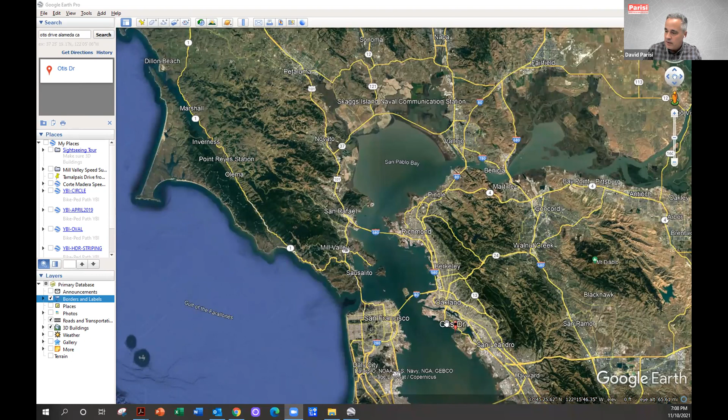Well, real quick, let me get this set up. You guys see the screen I have up right now? This is just Google Earth. Here's Petaluma, here's where I live. But over here is Otis Drive, in the city of Alameda, which is actually an island. I'm going to talk to you about this 1.1 mile corridor, what it looked like and what it is now. Let me show you by going right to a presentation.

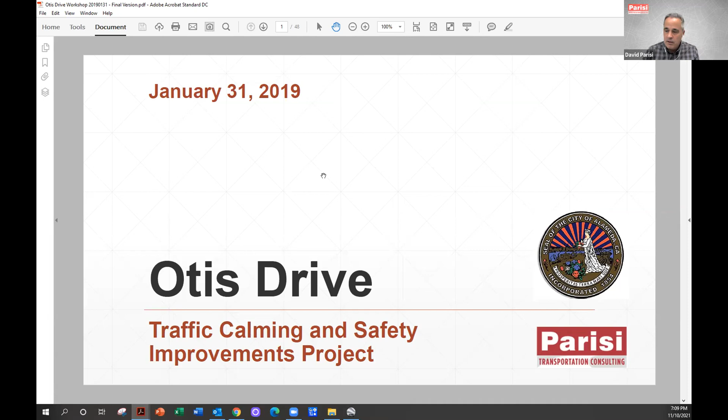Do you see the slide that says Otis Drive now? Okay, fantastic. So we actually worked very closely with the public because there were a lot of naysayers and folks who didn't want any change whatsoever, even though there were some existing issues occurring on this roadway. What I'm doing is recycling a presentation from our first meeting, because it was really effective, although it took a lot of work right up front.

We wanted to communicate with the community about the project's goals. At this first workshop, held in a gymnasium, we had about 100 people in attendance. But we also knew it was very important to get community input and really see if we understood what the issues were, because I think the most success we've ever had is where we've really listened and gotten ownership by a community on a project.

So this was really a listening session about current traffic and safety issues. Then we wanted to present a toolbox of different ideas and get feedback from folks on what they liked or didn't like, or questions they may have had. We had a breakout session with 5 or 6 groups facilitated to sketch out issues and ideas. This process really works well because it's important to get feedback, input, and buy-in. On this project, which was a little over a mile long, the goals were to reduce speeds.

Speeds were super high on this 4-lane street without turn lanes. It wasn't just the average speed, or the 85th percentile speed that speed limits are often based on, but also the outliers - the car that would occasionally come down the road at 72 miles an hour or something like that. We really wanted to understand that better.

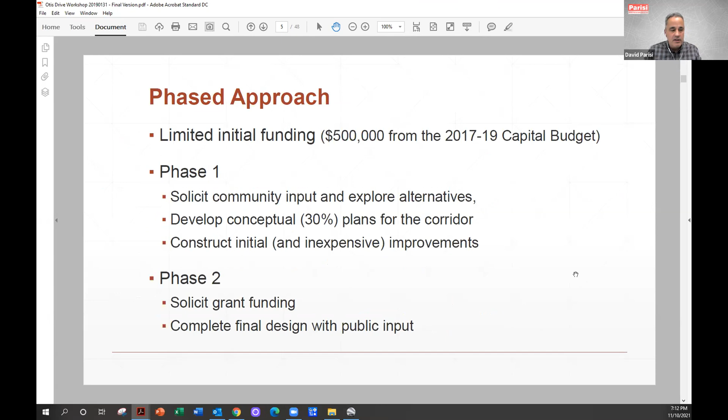We talked about the whole schedule and process, and then we dove into the history of the street. This is a fun slide, because in 1946, Otis Drive did not exist - it was out in the bay.

As Alameda started filling in, you can see it right here - the shoreline was here in the middle photo in 1958. This whole area was developed, and before long Otis Drive became a 64-foot wide, 4-lane street developed for the automobile.

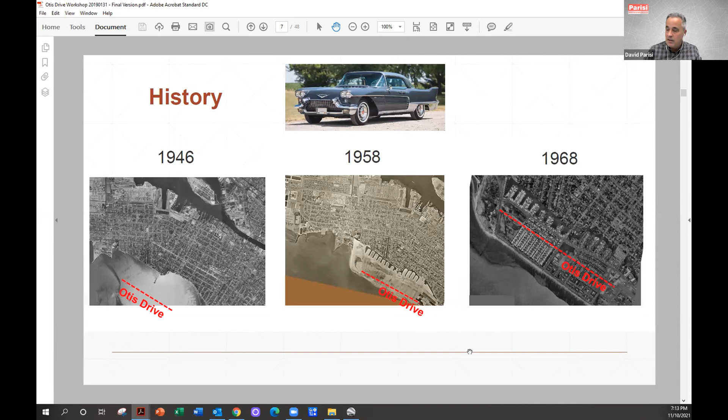And just up until last year, it was an auto street - you could actually land a plane on it. It was long and straight, and just had 4 traffic lanes and parking lanes.

We always knew it was important to also talk about things that have been done on the street, just like any streets in Petaluma. Things evolve over time - measures can be deployed, like leading pedestrian intervals, which I'm sure many of you are familiar with. When you push a button, the walk light goes up before the green light for traffic, so a pedestrian can establish their right of way in the crosswalk. It's a nice tool where it's appropriate. ADA compliant ramps were put in, and some protected left turns - a left turn arrow - and other things. But not much, just a bunch of small little things that were done.

In the meantime, here's an image of Otis Drive from west to east, and it intercepts a state park on the west side at Westline Drive. It had zero traffic controls or crosswalks all the way down to Grand Avenue, which is a signalized intersection, and also where the pedestrian fatality occurred. There was 1 crosswalk at an elementary school, and that was really it, folks - pretty straight, pretty good bypass route.

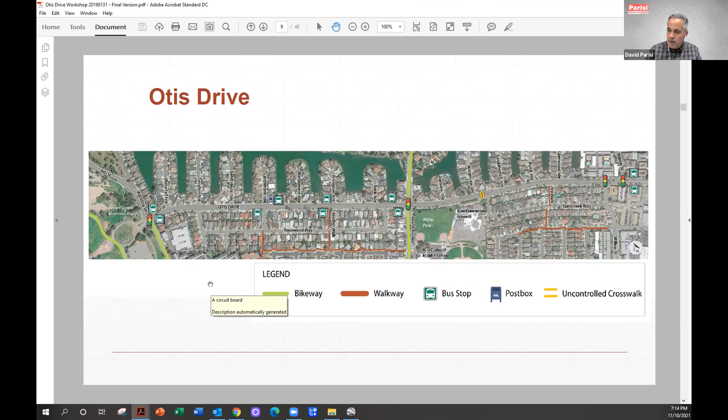And the island is developing slowly but surely, so these were things that were really on people's minds. Also, you can see the bus stops along this street. Here's how the street looked just a couple years ago - not unlike some roadways in Petaluma and in the North Bay, developed with 4 lanes of traffic and parking. Looks really familiar, doesn't it?

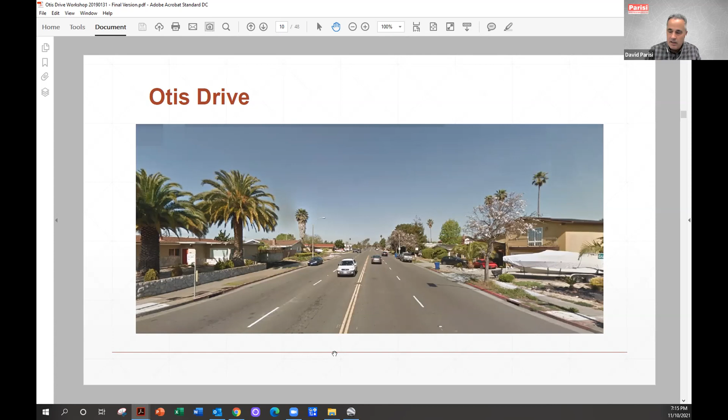We work on a lot of streets like this, and I almost see these as opportunities, actually, because I don't fret about wide streets. I think it gives you a lot of opportunities to do some things after you go through a good planning process.

We also knew it would be very important, even before we jumped into public outreach, to do a survey and really understand where people were coming from, so we'd be a little more armed and not get blindsided at a community meeting. We really wanted to understand people's input. Some of this presentation was developed based on what we knew from that input.

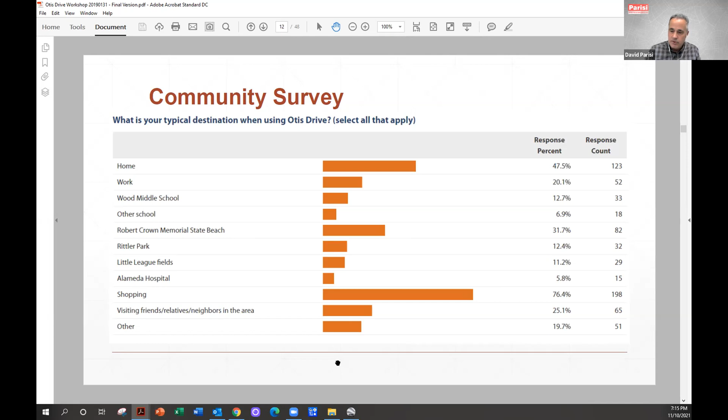For instance, we asked people before the meeting what their typical destination was. Was it work, home, a school, a park? What did you find most challenging? We ranked those responses - people thought traffic speeds or the safety of walking or biking, all down the list. And then some qualitative narratives from folks.

Speeding is a big issue. People drive like it's a freeway. Tough to get across the street. There's an intersection in the middle of the corridor at Grand that just had a green light, red light on each approach, with no left turn arrows or turn lanes. It was really confusing because it was right in front of a park and a school, and it was kind of a desolate street. Some folks wanted more trees and a better streetscape.

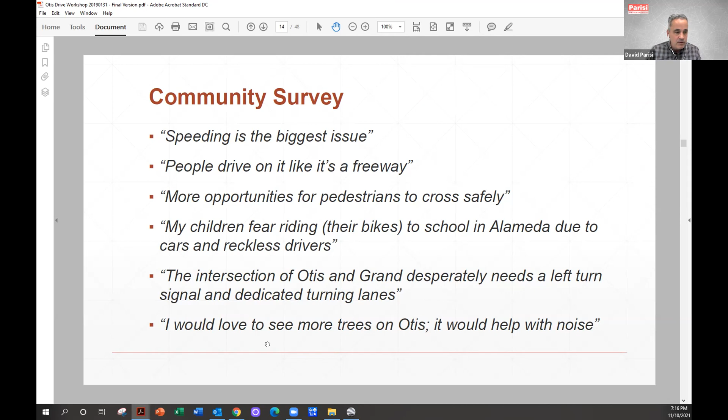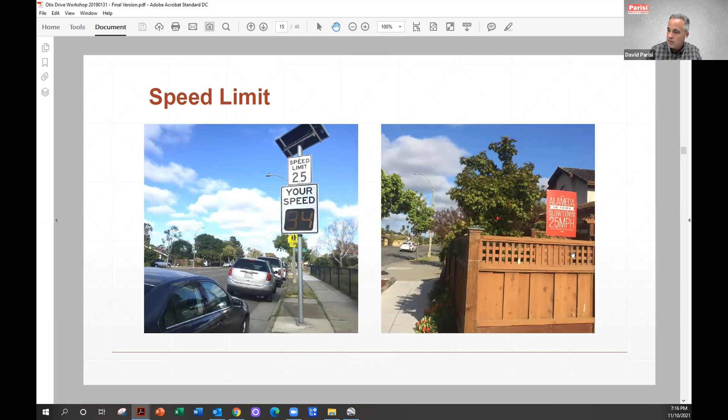The speed limit posted at 25 - you can see this sign here that says your speed 34, and that was on a good day. There were people driving very fast along this street. Like I said, there wasn't really any incentive not to, because the lanes were wide and there weren't any calming things in effect. In fact, some people took it into their own hands to add signs saying slow down, it's our town.

We knew it was also important to understand the types of collisions occurring, so we looked at a 5-year period and plotted them out. Bicyclists and pedestrians were involved in about 19% of collisions, but of those severely injured or killed, it was 54%. So vulnerable users - we have to be very careful, particularly with the speeds we saw and the long crossing distances.

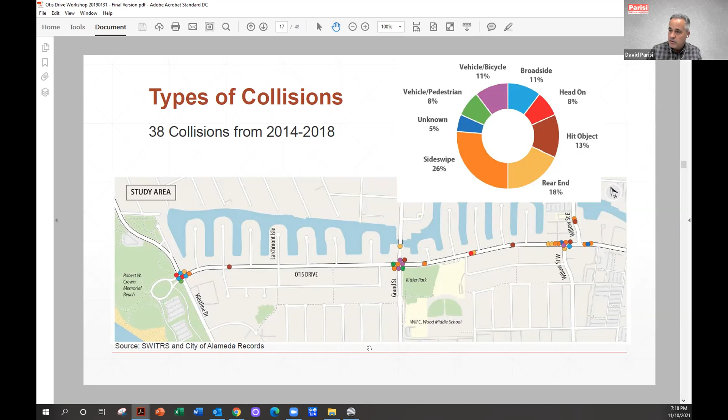That's partially what this project was designed for - those vulnerable users - but also to encourage and provide better safety for bicyclists and pedestrians. Injury-fatal crashes by mode was actually 54%. So it's really important to understand that and who's suffering the most from these types of collisions.

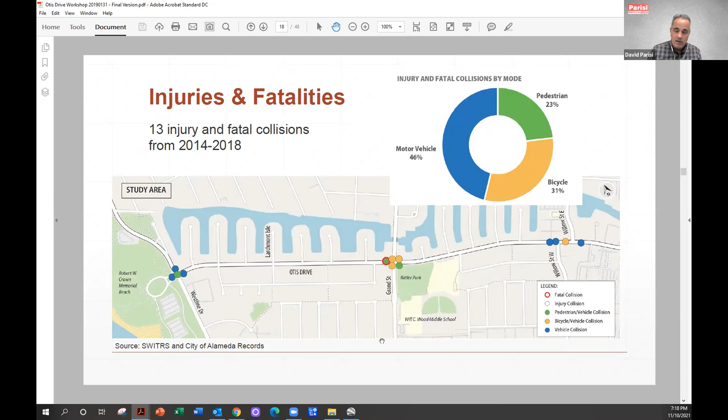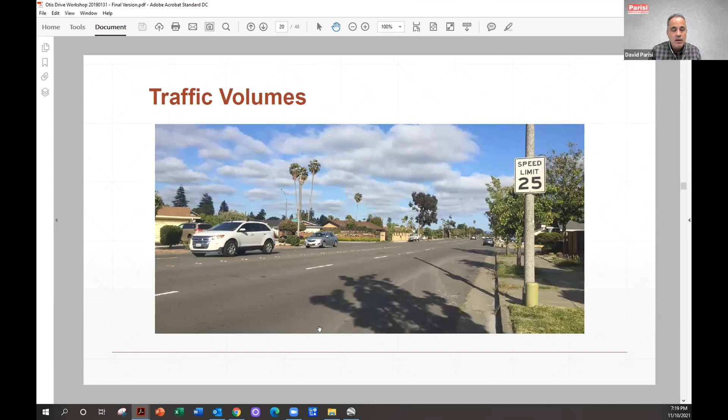There were a lot of folks who didn't want to see any change to the street, including many who lived along it. They felt that any change in the number of lanes would cause extra congestion or traffic diverting to other streets. So we looked at traffic volumes on both sides of the corridor and plotted them in each direction. Average traffic volumes varied from about 9,800 on the west side to almost 15,000 on the east side. Road conversions of 4 to 3 lanes typically happen at about 20,000 vehicles, so you can start looking at that.

So we were well below that threshold. In other words, we knew that if this was done in a very methodical way, we would possibly be able to take it down from 2 lanes in each direction to 1 in each direction with a 2-way left turn lane. We proved that to folks by overlaying it with lines showing the capacity of a roadway with 1 lane in each direction, shown in red here with red dots, about 1,000 cars per hour per lane, versus a roadway with 2 lanes in each direction, which this road had at the time. So you can see this is already well below what would be the threshold typically for doing a so-called road diet, a term we're not using a whole lot these days, but we did it during this exercise. We just like to think about reallocating the traffic lanes.

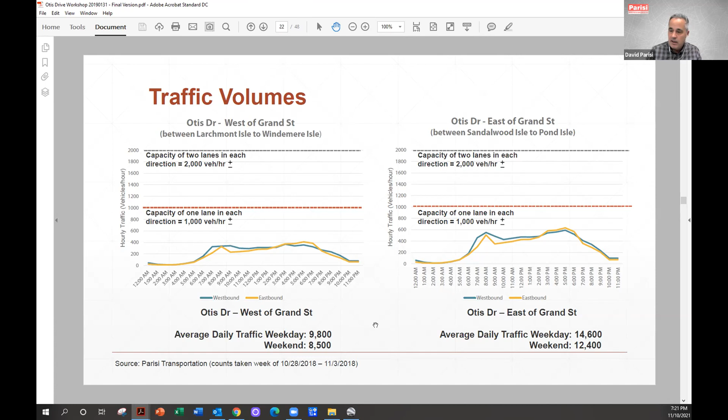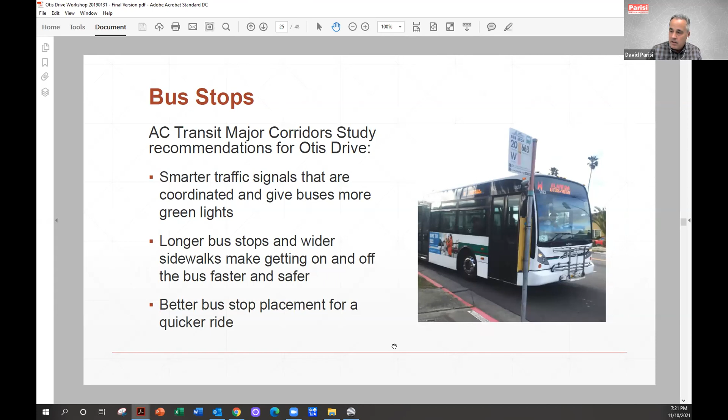Bus stops, as you can see in these pictures, the buses really didn't have ADA stops. It's hard to tell, but they were also near side, which would cause more congestion and inconvenience for drivers when they're entering back into traffic. Some bus stops had higher ridership than others as well. So those are things we took into account because we wanted to see if it makes sense to relocate and improve some of the bus stops and their operations. AC Transit, the bus provider there, has some goals and objectives that we were working with at the same time.

So the next thing we did with the community is we mapped out some traffic calming and safety tools we thought should be discussed and what we heard about from community members. Just a real quick overview of pros and cons of the different types of measures. And we wanted to understand and describe what traffic calming is and what some of the safety objectives were. We went through some of that.

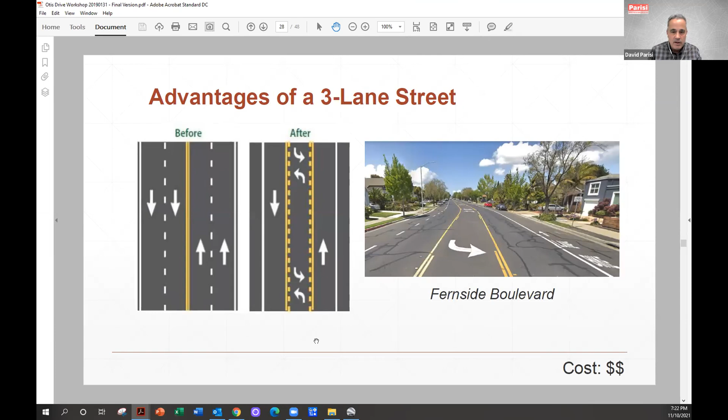First off, we obviously talked about the advantages of a 3-lane street instead of a 4-lane street. You can see the before and after image on the left here. We relied on data from lots of studies, not only in the Bay Area, but compiled by the Transportation Research Board and the Federal Highway Administration, in regards to going from 4 to 3 lanes and in terms of accident reduction, speed reduction, the types of collisions that occur, what it means for pedestrians with fewer lanes to cross, the opportunities for refuge islands and curb bulbs, and what you could do with that reallocated space. In this case, lots of different things, including providing areas for bicyclists.

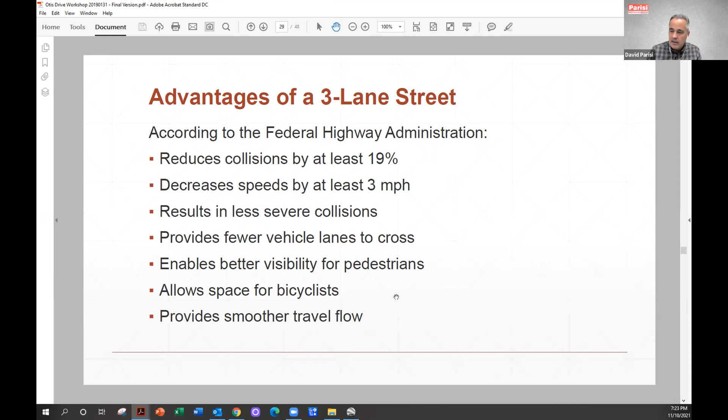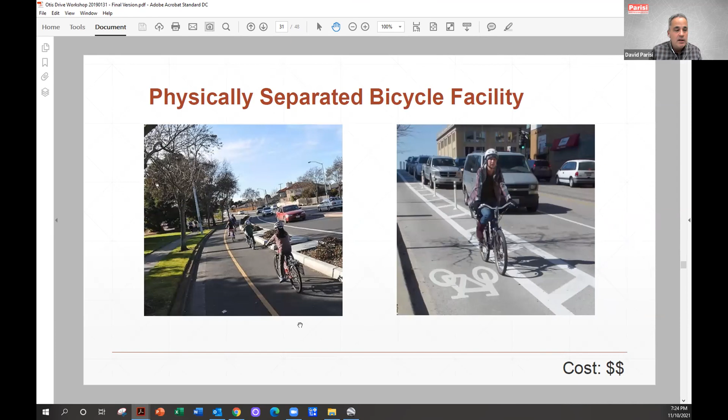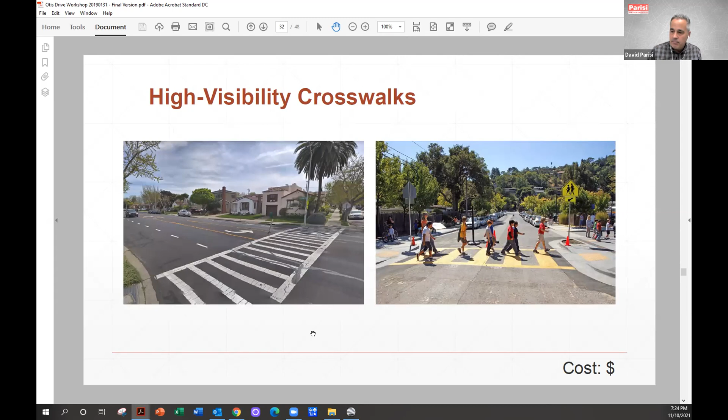In different forms, obviously as I showed you before, the roadway did not have many crosswalks across the street. So we wanted to really talk about that and understand from the community's viewpoint where those should occur and what they thought the best routes would be.

We also knew there were a lot of intersections where cars parked right up to them, really limiting the sight distance. So we call this daylighting, where we put maybe some red curb in or a curb bulb about 20 feet back or 20 feet ahead of the crosswalk, to really provide better sight lines between a motorist and a pedestrian and vice versa.

And we wanted to get feedback on other things like rectangular rapid flashing beacons, and the opportunity, if we put in turn lanes instead of 2 through lanes in each direction, but actually devoted a center lane for turns, what folks thought about that. And we gave some input on our idea.

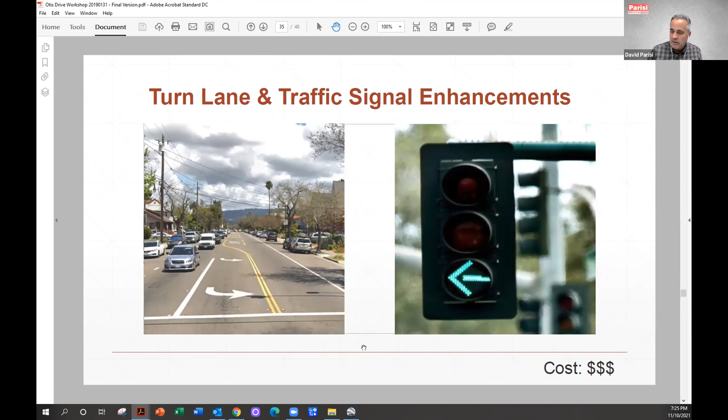This is a community that had not seen a roundabout yet, so we knew there was room. We were not going to propose or show tools that wouldn't make sense, but we wanted to get people's feedback on roundabouts. There were a lot of skeptics because they hadn't seen them. Many folks thought of the rotaries they've driven on the East Coast or some of the older ones. So we wanted to describe some of the attributes of modern roundabouts, with splitter islands and slower speeds, and the reduction in types of collisions that can occur.

I'm sure, Ken, you get this question a lot: why not put up a stop sign? We've heard it too on this street, people saying just put a whole bunch of stop signs up and down the street. As a traffic engineer, in the studies I've seen, we know that stop signs don't really slow down speeds along a long corridor because people just make up for lost time. They really should just be used for assigning right-of-way at intersections.

So we just needed to get that out there and answer those questions and get feedback from folks. Then we wanted to understand from people's perspective how important parking was to them. We knew we had a super wide street, we could retain parking, but we also realized parking could be removed. It might be beneficial to open up those sight lines, or if we wanted to shift some parking into the street a little bit to provide a parking protected bikeway, we wanted to understand the community's perspective on the importance of parking.

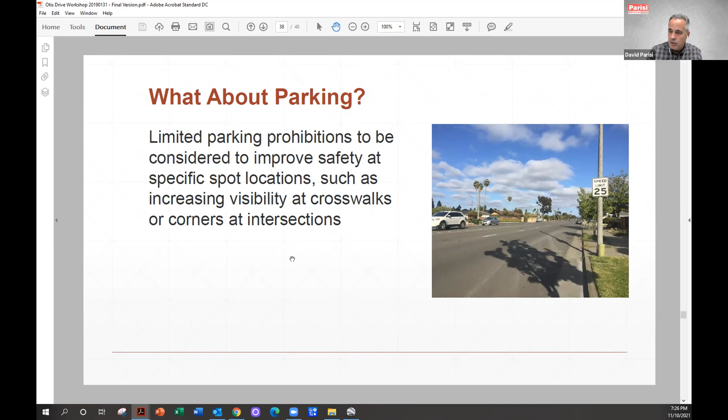We also talked through this pretty fast with the community, because when we did the breakout groups, we went into more detail with additional experts. But we presented the opportunities.

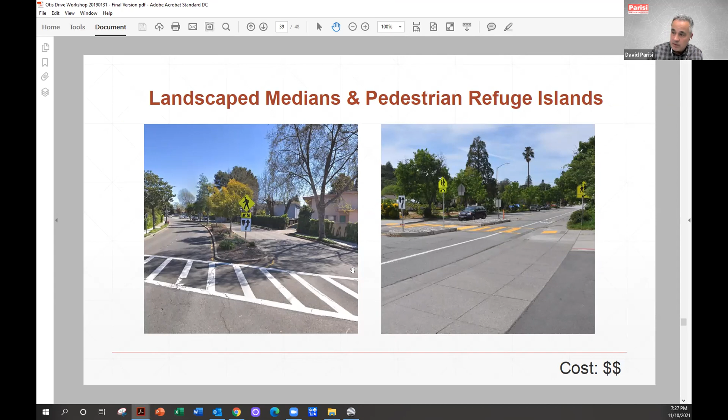If you go to 3 lanes, you could use that as a center area for refuge areas for pedestrians, enabling people to cross the street in 2 stages, which, by the way, gives you 5 times more gaps when crossing in 2 stages than in 1, just because of how the traffic flows work. You can cross one direction at a time, seek refuge, then cross the other.

That's great. Bulb outs, again, a lot of these tools have been used in Petaluma, and I love coming through Petaluma through the years because it's been very progressive in certain areas where the projects have been built.

And then we wanted to introduce what's called quick build kind of projects, because we knew that the first phase of this project may not be spending millions of dollars on concrete and drainage and other types of improvements, but actually what can we do lower cost.

We do some colorized curb bulbs, and I'm going to show you some in a bit that are proving very successful and were low cost to implement and actually look pretty good.

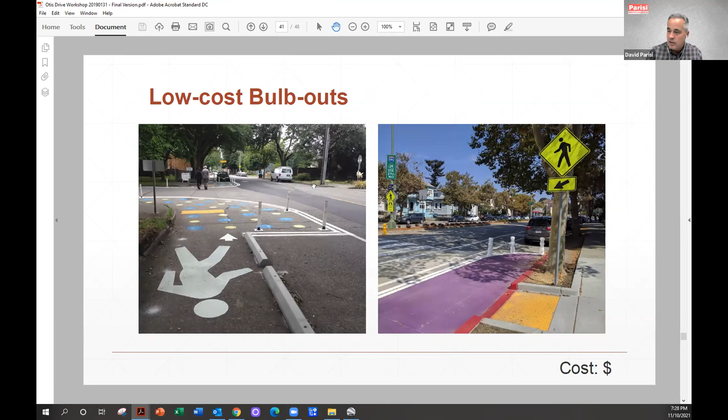But here's some samples from some other locations that we wanted to show the public and get feedback on. And of course, gateway treatments can take all forms, and what they are is just a treatment to announce you're entering a neighborhood, a pedestrian zone, or a school area. So treat this area with respect.

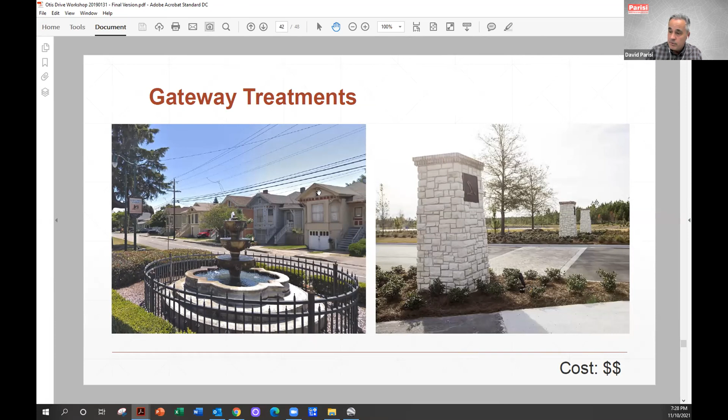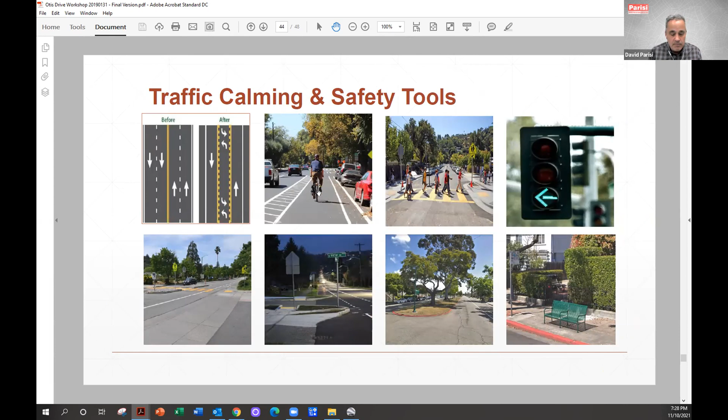This street had really poor accommodations at the bus stops, lack of benches and shelters and trash cans. And then we just said, okay, that was a lot of stuff, and there's a lot more things out there, so we want to hear from folks. Tell us your input, and we'll describe more of the pros and cons working with you.

So that's what we did. That was kind of a first workshop, and I think it's really important to bring the community involved, get the community involved, and explain things, but also just be open to listening to different ideas.

And what we did then was broke the group out into groups. Each group spent about 30 minutes with a big map of the corridor, talking about issues. Some groups just wanted to talk about their concerns, and other folks got really into it and came up with some ideas and presented their feedback back to the group.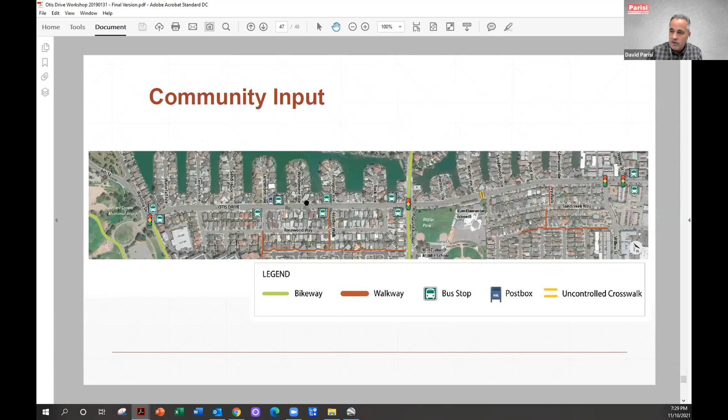What I'm going to do next is take you through where we ended up next, and then I'm going to show you a video of what actually ended up going on with the project.

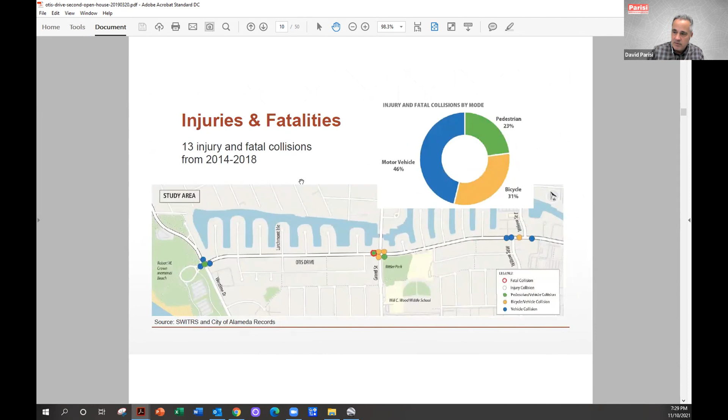It's always nice to have the police there too, to support the fact that, yeah, they're seeing these big speeds and collisions on the street.

And what should be implemented? We wanted to hear from folks, and lo and behold, the majority said, let's get that center left turn lane in, because not only can it help introduce other aspects, but even for folks living on the street, they won't have to take a left turn from a through lane and go into their driveway or out of their driveway. Maybe that could be safer to provide access. Bike lanes, landscaping, curbs.

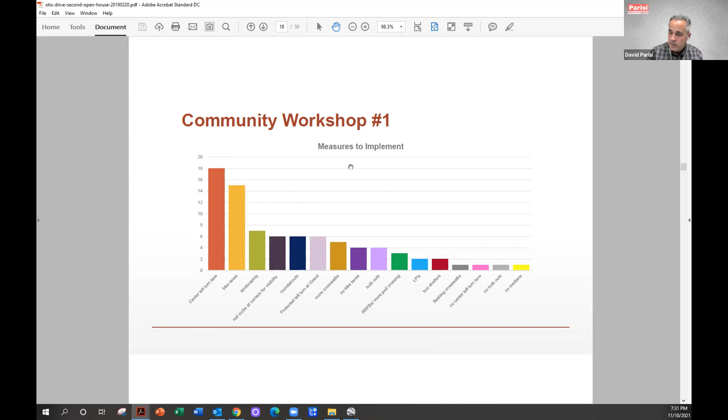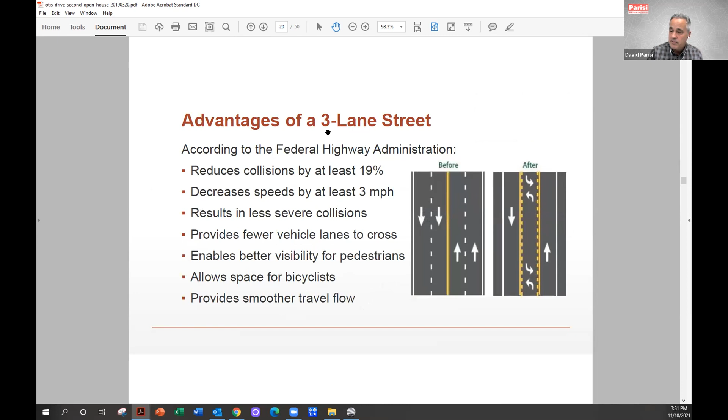And so we got some really good ideas, ranked them out, and started sketching out ideas with all the information we had. You remember, and again, this was several months later, we had some new participants in the audience, so we just wanted to recap some of the same things we had heard about before.

And then at the same time, we came back with a sketch. Actually, it was more than a sketch. It's a plan that showed our idea for the street. And I'd say, when I say our, I meant the whole community. And so we went through every single location, what the existing conditions were and what we were proposing.

In this case, it was narrowing the street. It was 64 feet wide with 4 12-foot traffic lanes in existing conditions. We were able to divide it up, retain parking, provide a bike lane that's buffered from traffic, provide a narrower traffic lane in each direction of about 10.5 feet and an 11-foot center turn lane.

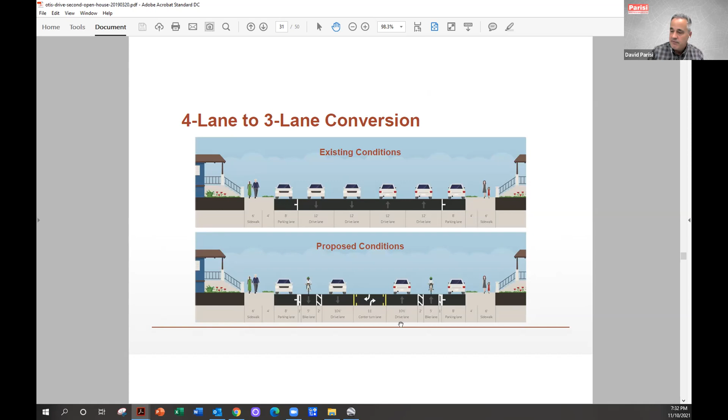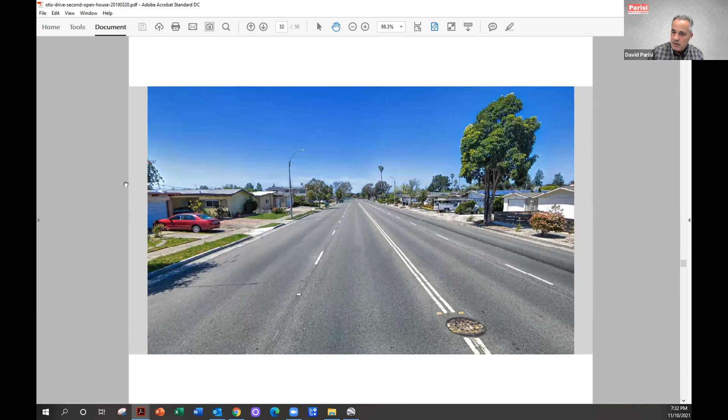That was our proposal. So we wanted to get feedback, and to really demonstrate what this would look like to folks, we did just a really simple rendering of a before versus an after of what it could look like. So I'll toggle that back and forth. This was super helpful to explain to folks, hey, look, there's your house, there's the parking would be retained, there's a little bit of a buffer, oh, and what about street trees?

We heard about that because it's really barren. Here's some opportunities, right, to over time add some landscaping, possibly develop a canopy on this street and make it more of a welcoming roadway.

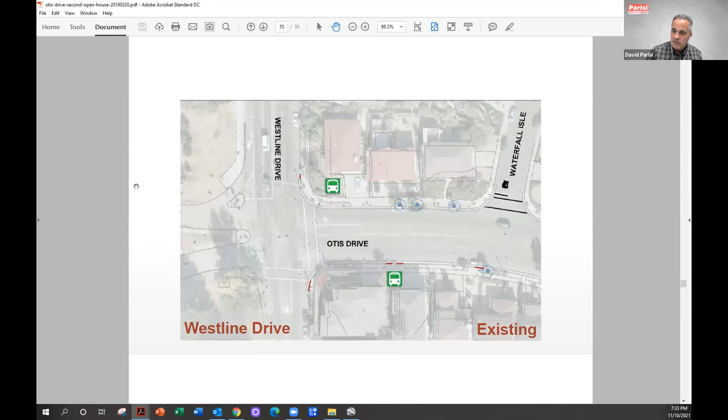And then what we did with the community is we went through some of the key hotspots to talk about existing versus proposed ideas. This is from west to east, for instance. Here we're showing bike boxes. I don't know if there's some in Petaluma yet. Are there? You guys know? Not yet. Okay, so a bike box is a tool that allows a bicycle on a red light to get out ahead of the traffic and establish their position, so when the light turns green, they can go first with less potential for conflict.

And you can see we proposed a couple bike boxes, which were later implemented on this street. It's important for bike boxes, by the way, to have a bike lane that feeds them. So that's pretty important. That's something that was shown here, as well as some bus stop relocations.

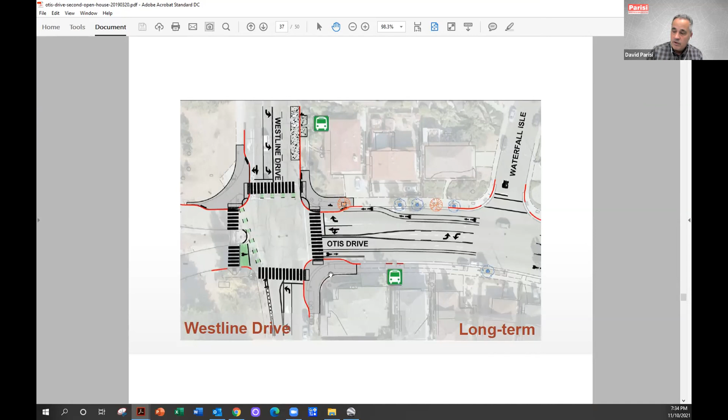We actually looked at short-term and then long-term ideas. We knew in the short term there just was not enough funding available to put in concrete curb extensions to narrow the street and the crossings, but maybe in the short term there's some ideas of how to do that with some paint. We had a lot of streets like this, which were very popular pedestrian crossings, or maybe a mailbox there, but nobody felt confident crossing the street because 64 feet, no markings.

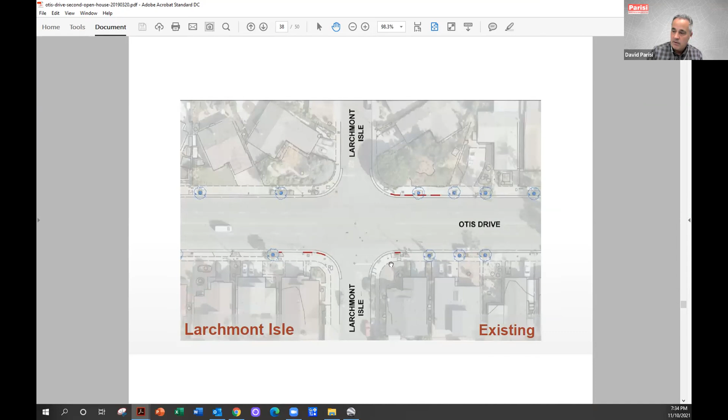So here's a location where our proposal was to, with the 4 to 3 lane conversion, provide some painted and bollard bulb outs. I'll show you actually how those ended up looking. We're pretty happy with those, but also high visibility crosswalks with rectangular flashing beacons.

In this case, it's super important to understand which side of the crosswalk the community uses - I mean, the right side of the street to cross, those kinds of things. And then long-term, what this can convert to if it's successful and there's more money in the future.

Providing curb bulbs - I love curb bulbs because they make the pedestrian crossing shorter, provide better sight lines between pedestrians and oncoming motorists, and slow down turns. So they serve a lot of purposes, but providing them in concrete and moving them out can be very expensive, sometimes $50,000 or more, just because of drainage issues. Alameda is a very flat, land-filled island, so drainage is very difficult.

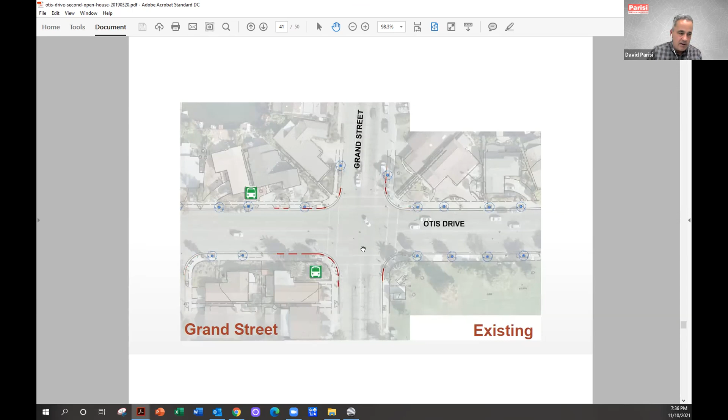Interestingly, our project got expanded onto Grand Street, and we ended up designing Grand in each direction as well to tie everything together. But here was the initial short-term idea we wanted feedback on, and we ran traffic operations.

You'll see a couple other things here about active transportation, the buffered bike lane, and potentially an opportunity to go through on a green light, put your bike here, stop, and then when the light turns green for Grand, they come across. These are termed Copenhagen lefts for bicycles, often on the far side of an intersection - pretty neat. We also looked at a bulb out for the long term, and then introduced the idea of a roundabout.

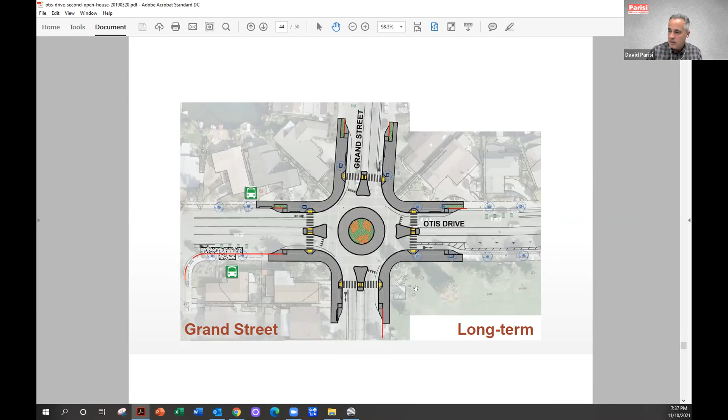This would be the minimal acceptable size, and we knew that, but we wanted to talk about whether this would work. It's interesting because they have a big July 4th float parade in this town, and we needed to test it against their longest float to make sure it could get through. You'd think it was Pasadena or something, but we had to actually test it against vehicle types to make sure if this was built, they could still have their parade.

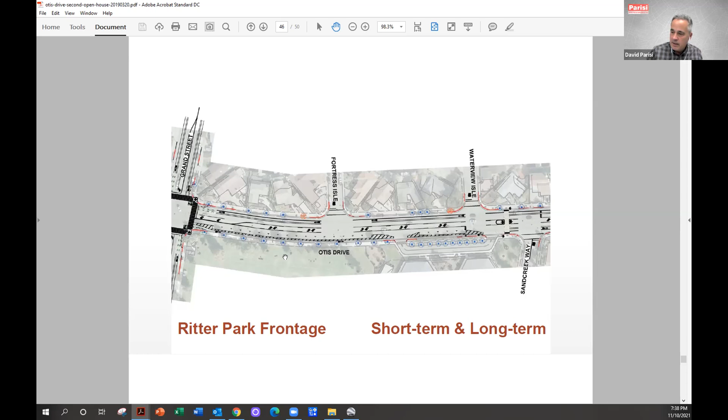There's a park here, and there was an opportunity - hard to see in this image, but I'll show you in the video momentarily since it did get approved - to provide floating parking. This is actually a parking-protected bikeway: the parking would sit out in the street with a buffer behind the passenger side of the vehicle, and a bikeway by the curb, so the parking acts as a deterrent or protection for the bikeway. That's something we wanted feedback on from folks.

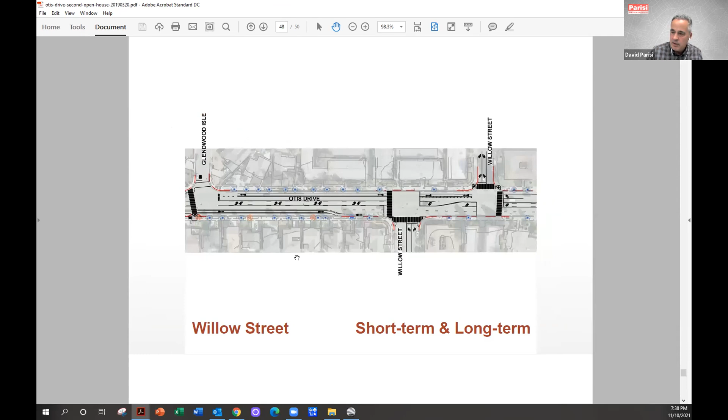I'll just skip through some of this stuff. Again, we went through all these ideas we had, but it actually was the community that provided the feedback, and we tested them with the community.

So with that, I want to show you the final product. Dan, I don't know if you can queue up that video.

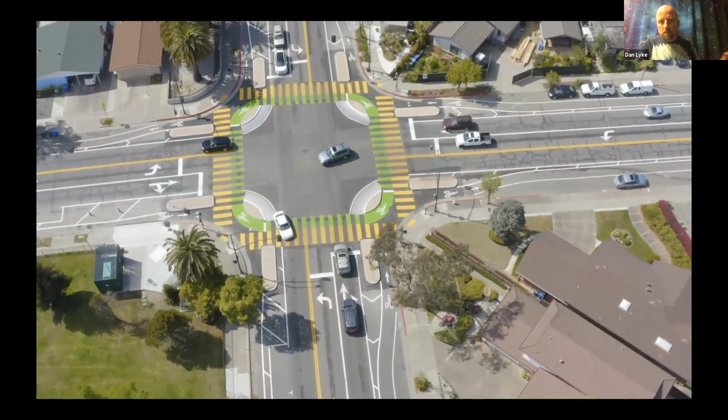You can ride around it through those green bikeways. There was enough room to do it, and investment was made in these little biscuits on each of the four corners. It's turned out to be a really big success there. As a matter of fact, I predict the roundabout will probably never occur, and at probably 5% of the cost, the protected intersection will stay because it's performing very well.

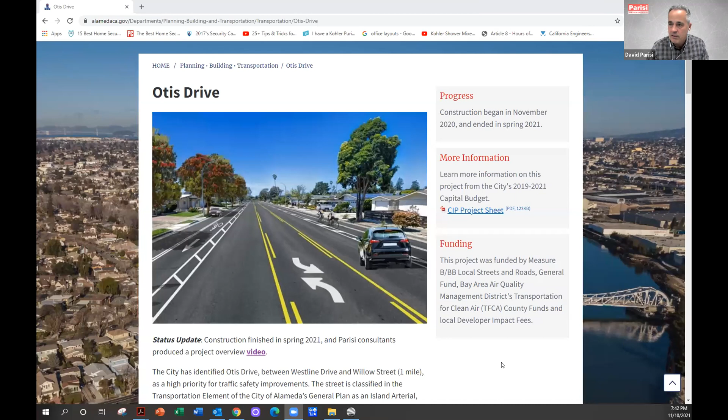I'm going to share my screen one more time and show you a few other things that may be helpful in the future. If you want to learn more about this project, the City of Alameda has a web page for it - just Google Otis Drive, City of Alameda.

It has some additional information on some of these tools that I think are pretty helpful. It talks about road diets and some of the bullets I discussed before, some of the resources for the Federal Highway Administration. And before any of this was deployed, we needed to get out ahead and describe, right before construction, what was going to happen and what some of these different elements were.

For instance, a protected intersection that I was describing - what is it? What are the benefits? What does it look like? So we did a diagram, really described what it is, how it works, what to expect. Also the diagrams were posted out front of the project before and while it was under construction, so people knew what was coming and were reminded what the benefits were of these different treatments.

You saw this earlier in the video - these are painted curb bulbs, but we use a special treatment called Street Bond, which lasts a long time and looks good. I think that'll mean we can retain these painted bulbs for much longer than we would have thought. Keep an eye on them, and if money comes around to do curb extensions with concrete at some time, install those as well. And then finally, bike boxes - more about bike boxes, how they work, and tools, and so on.

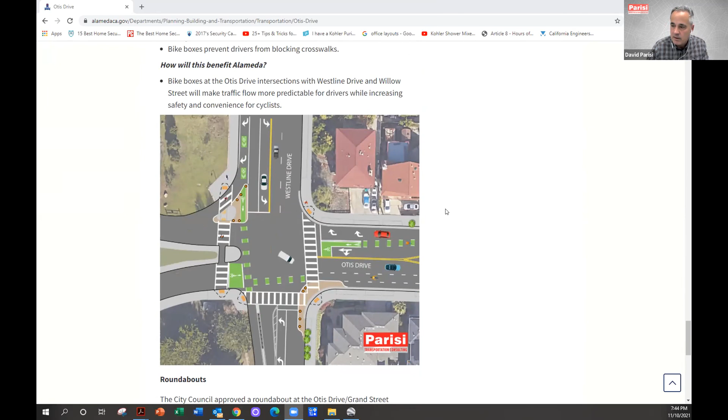And then we also wanted to recap with the roundabout - this was put up just as a reminder, also as what the folks had accepted and how to behave, and what the pros and benefits of these things are. So with that, I'm happy to answer any questions.

Again, head on out there, take a look at the street. We're right now performing some after studies, and we are seeing the speeds have reduced by about 3 miles an hour on the street. We're seeing increased usage by pedestrians and cyclists through that protected intersection, and we're collecting other data as well in regards to traffic volumes. We've not seen any diversion - the traffic numbers have stayed about the same. So happy to answer any questions you may have.

So we have a couple of questions, but they might tie into things Ken was going to talk about as well. First is more of a procedural one: how does a street end up with a legal speed limit of 25 miles an hour and an 85th percentile of 33 or whatever it was? I know the street adjoining mine was pushed up to 30 because the speeds on it were high enough that there was some legal issue about enforcing the 25 mile an hour speed limit. Can you talk to that a little bit?

No, we can just scroll through it, but real quick, the fatality occurred with the vehicle turning left through the intersection, because it did not have controlled left turns or protected left turns. This is a big cause of pedestrian injuries at signalized intersections: left or right hooks. Left hooks occur when a vehicle is turning left and hits a pedestrian. Now usually that should not occur if there's a left turn arrow, because those movements would never occur at the same time. But the fatality that did occur, a vehicle was turning left on a green ball or green light, and the pedestrian was crossing with the walk signal. That's what occurred at that point.

Okay, if you go, you're almost there. If you just go a little bit to the right, a little bit to the right, right there. How's that? Oh, it's a little fuzzy. Right there, stop, there we go. Yes, okay, perfect. I'm not sure if I can annotate, but I think you can.

Yes, I can. I definitely can annotate. Awesome. Woohoo! Okay, all right.

Thank you. So right here, I'm going to start over here. There's a bike lane coming in, and as you can see, it actually swerves over against the curb. The bicyclists have some yield line, shark's teeth here, and they're supposed to yield to any pedestrians crossing the street. But if this cyclist wants to go right, they can go right. If they want to go straight and the light's red, they stop right here. If they want to go straight, you continue this way.

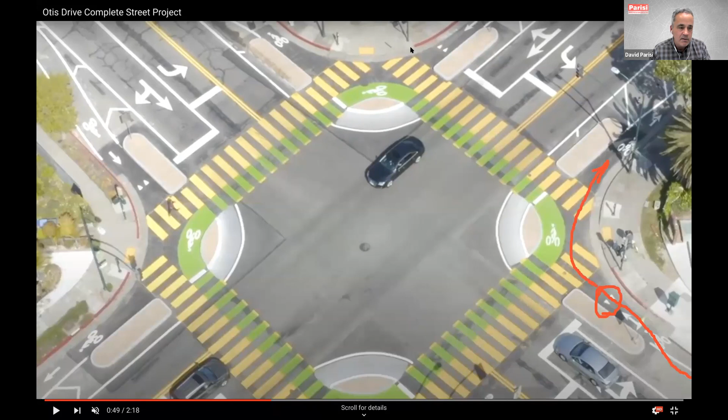But if you want to make a left turn, you don't have to enter traffic. What you do is you just go here, stop when that light's red, and then you come across and go on your journey. So you never have to enter the intersection as a cyclist, you just stay to the right.

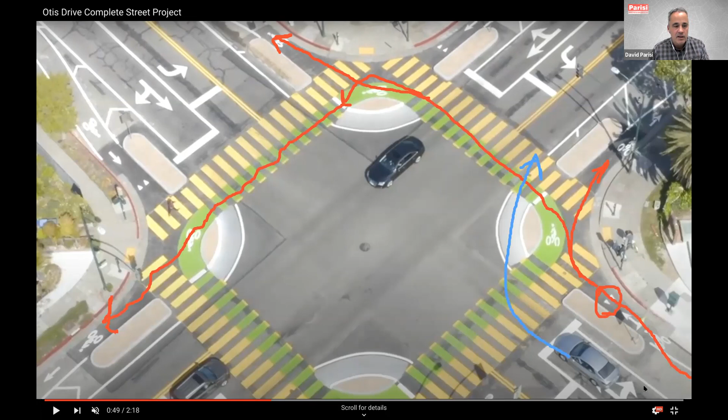Vehicles that are turning right, we designed it so that they have to make a tighter turn - hopefully not that tight, because this one drove over the curb, but that was just my drawing error. The intent is that there's no more fast right turns. If the car is turning right and they see a bike there, they can stop right here without impeding traffic behind them. So protected intersections are important to have that space for a car right there, so they're turning to the right.

So that's kind of it in a nutshell. There's a whole bunch of literature, and you can see there's some YouTube videos of protected intersections.

This one, the secret for us here was the design of these, what we call biscuits over here. These are raised, this thing here is raised, and then this concrete apron is also raised in the middle. It goes up and goes down. So if you're a vehicle that needs to cross it, like a larger vehicle, you're going to feel it - you're going to go up and go down. But mostly we want the cars going where this one I drew in blue is. The larger vehicles will go up and down the apron, they'll feel it, and it'll help slow down their maneuver.

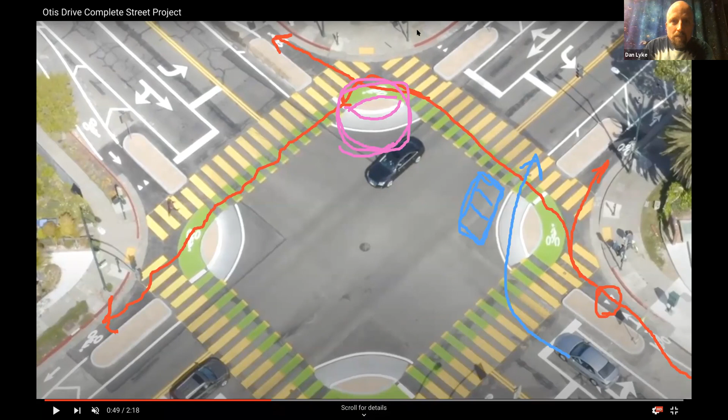I was just going to add, you can see that there are 12 islands here - 1, 2, 3 times 4. So there was construction cost associated with this. This was the highest cost feature of the street, but substantially lower cost than a modern roundabout would have been.

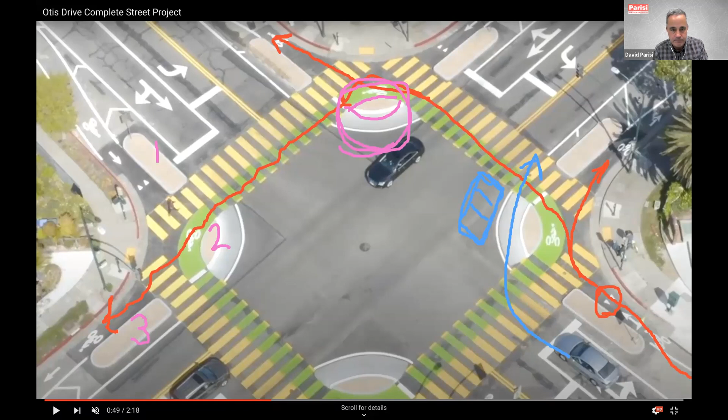I'm still sharing the screen here, so I have to get back to my notes. But how much, what did all of this cost? I'd have to look back, but I think it was under $1 million for the... entire design and restriping and whatever curbs you need to put in.

I'll note that the roadway's pavement was in pretty good shape, so there was no pavement work that needed to be done. That's important to note. For the most part, it was done with striping and special paving treatments. And then the intersection that I showed you, plus some bus stop enhancements, were most of the infrastructure.

And I think I know the answer to this, because the sort of thing I do for entertainment is reading design guides - I was doing this for prep - but what buffers do you have for the various different bike lanes? What does the geometry of that look like?

So that's often going to be a negotiation between how wide you want the bike lanes versus the buffer and the traffic lanes, and also the total width of the street. In this case, I believe we went to a 2.5 foot buffer for the most part. And then when we had the parking protected, we wanted our buffer between the cars and the bike lane to be a little wider, so that pedestrians could walk down that buffer if they got out of their car - so that's like 4 feet. Again, there are ideal dimensions for all of these things, but it often comes down to how much room do you have to deal with.

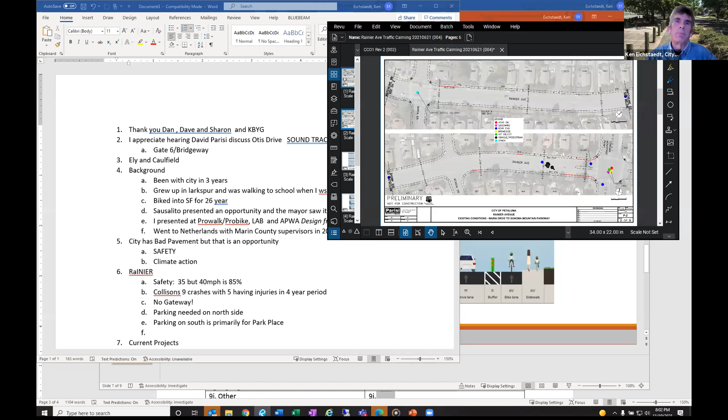So over a roughly 3.5 year period - actually, let me back up here. We're going to talk about Rainier. I'm going to show you a picture: what we're looking at is North McDowell up to Sonoma Mountain Parkway, and then we've got a stop-controlled intersection at Maria Drive. We've got 3 schools in the area.

There's Bond Park, and there's also the access to the Lynch Creek Trail here off of Maria. So schools, parks right in the area.

If we go in and look at the safety issues, starting with crashes, there's been 9 crashes over a 4-year period. 5 of those had injuries, and there was 1 pedestrian.

I've gotten a lot of public comment. Somebody said, well, what's the problem? I think, well, that's too many crashes. If the City of Petaluma is active with Vision Zero, I don't think we want that.

So I looked at the 85th percentile speed, and that is interesting because it's posted at 35. I think that's too fast. But the 85th percentile, so 85% of the traffic is going at 40 miles an hour or less. That's a whole lot on a neighborhood street. Is that what we want for our neighborhoods? I think we need to ask that question.

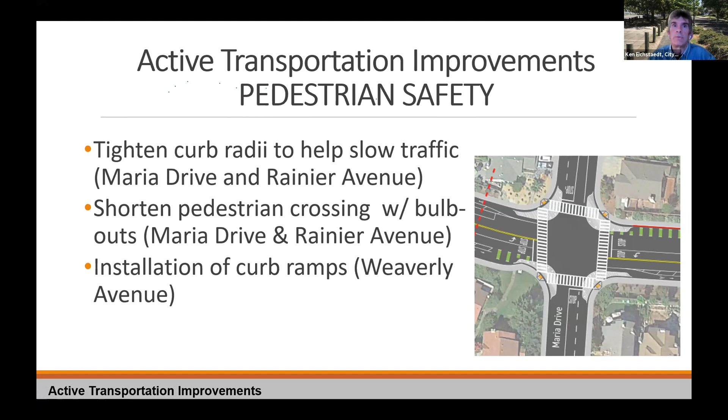Just to bring a little bit of awareness, we're bringing the pedestrian out further into the roadway, in the bulb-out area coming off the existing curb. They're going to be more visible, they'll have a shorter crossing distance, and motorists won't have to wait as long because they'll get a head start on this. So this is a really good thing.

Looking at the bicyclist—this is a draft example, but I think it's somewhat representative. I should mention Rainier has parking on the south side. We're going to talk about Rainier going east to west, from Sonoma Mountain Parkway to McDowell. The south side does have parking and the north side has parking too, but the south side really doesn't need it.

I've spent a lot of time with the public. I've talked to the property managers at Park Place. There are things we can do there. But this is one alternative where you can get buffered bike lanes in there and still keep the parking on the north side. David's had some really good ideas on this. So that's a little bit about what's going on in Rainier.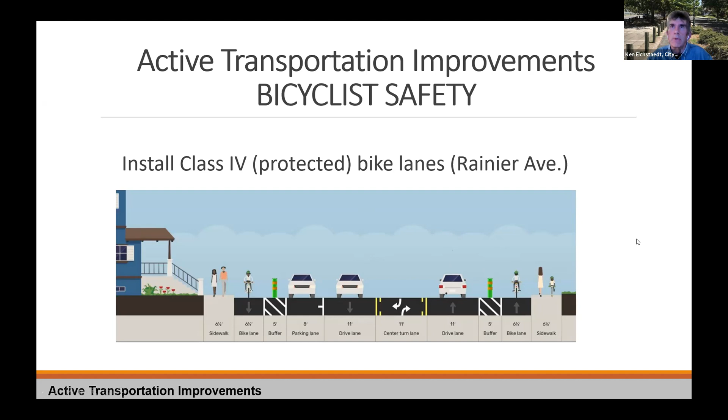Right now, the process is we're going to have a public meeting. I'm pushing to have that in the next month or so, and we'll see what people want and where the interest is. But I think we have a lot of opportunities here if we're interested in climate action and Vision Zero. Maybe we need to kind of rethink things.

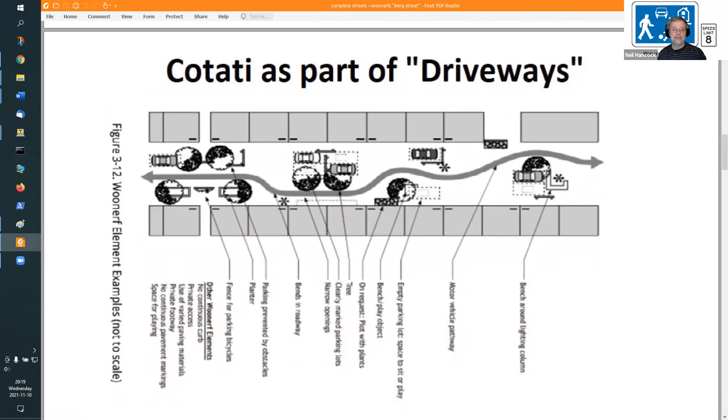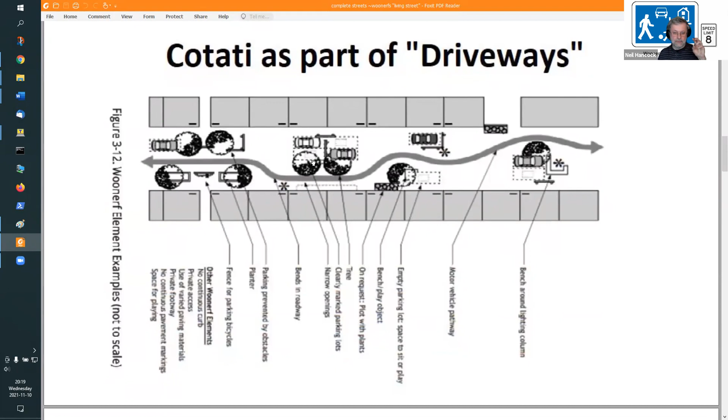I don't know if this is the best place for it, but I want to talk about the principles and some disadvantages of driveways, and where this could actually work. You can see from this line the idea that a vehicle has to move and meander as it goes through. There are either trees or parallel parking spaces—parallel because there's less hidden space behind the car, so it won't move out into the road and there can't as easily be children hidden behind it. There's also street furniture—that's the core concept of a woonerf.

Now we're getting into the challenges. For active transportation, we may end up with more asphalt and blacktop—this happens time and again as things get specified, wider areas, more asphalt. Personally, I think a concrete grid with grass going through it for low-speed private places would work well. I have a small driveway on a private house that's crushed gravel, and it's worked very well—that's how it was when I bought the house.

For private roads, which is where Cotati is initially talking about this, it turns out when you go through it: you've got the parking where vehicles actually park, then the parking access—how does a vehicle turn into that—and then optionally the driveways that get from the street into the parking access.

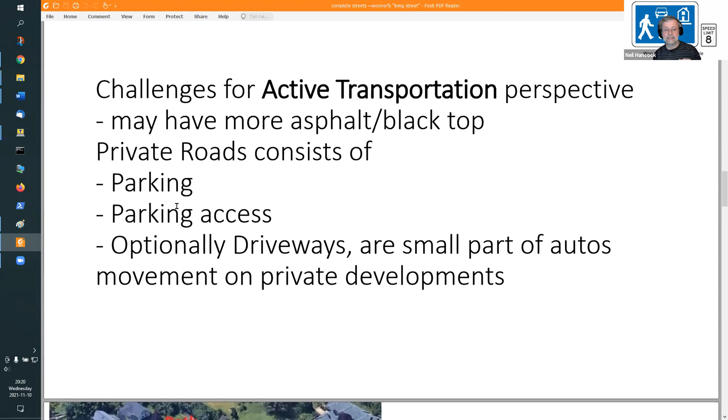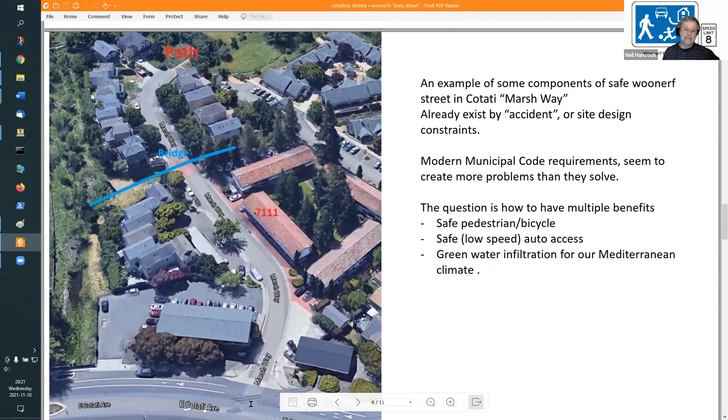And that is where perhaps the concept breaks down a lot, is that there's not a lot of driveway. Dave Alden told me that there's some places in Petaluma that he thinks have some woonerf concepts, but this is a street I've ridden down a lot, and I suddenly thought, wow, this looks like that as a public street. It's got a lot of these slow features, probably by accident, maybe site design constraints, but it's got this meander on the street.

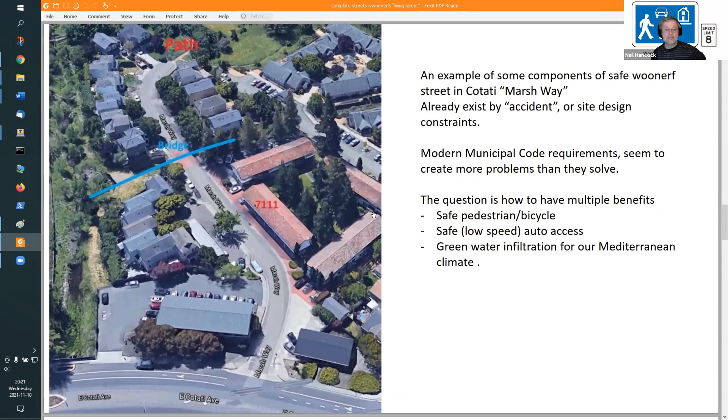It actually joins up with a class 1 bike path that is along the Laguna. It has an older type of low-income building down here with vehicles coming in, a very efficient process, more places over here, less efficient access. It has this necking because of the bridge, and it actually feels pretty easy to move on, not that constrained as a street.

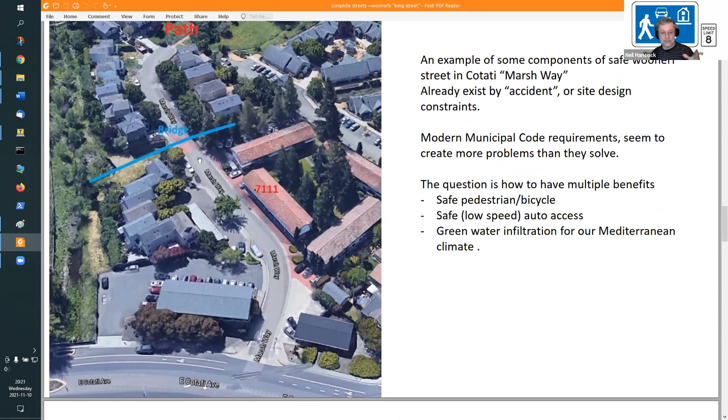So East Cotati Avenue, a major arterial road - that's as a street, what's already there. This is just a little bit away, and it's two buildings - a Luther Burbank housing complex and another low-income housing complex with very tight access through a minor driveway that's almost non-existent. Cotati's current concept would outdate these types of things, make them non-conforming, and I think that's a bad idea. But they really work.

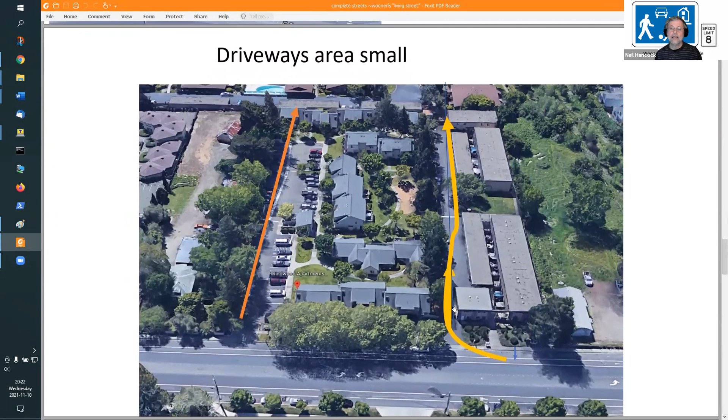So here's a bicycle tour. There's my bicycle coming into it. It really works as access, and there's 16.5 feet from fence to walls to be able to get things through it. A little bit further down in Cotati, there's Cotati Lane, is what this is called.

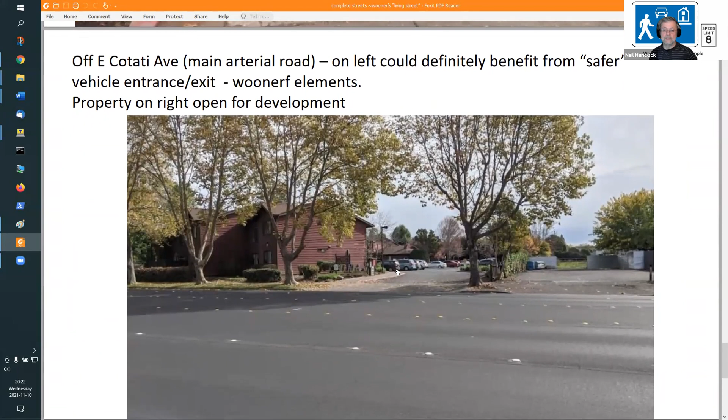And again, it has some of these concepts, but what would it be like if there was a bit more of a meander around here and less of a straight line to go through? Here's something further down the road, more towards the train station, which definitely could benefit from a concept of some curves or some street furniture in there across the acres of asphalt that is East Cotati Avenue, which is 2 lanes in each direction. So that's the sort of the basis.

I just want to flesh out some ideas. I think what's in process in Cotati, I'm certainly trying to still work with what's being proposed and see if it can't be pruned more. There was something in the code when it came to the Planning Commission about doing something for frustrated drivers, and I sort of got that removed, because I think part of this is to make the drivers cautious when they move into somewhere. You want them to be able to both appreciate the surroundings and move cautiously.